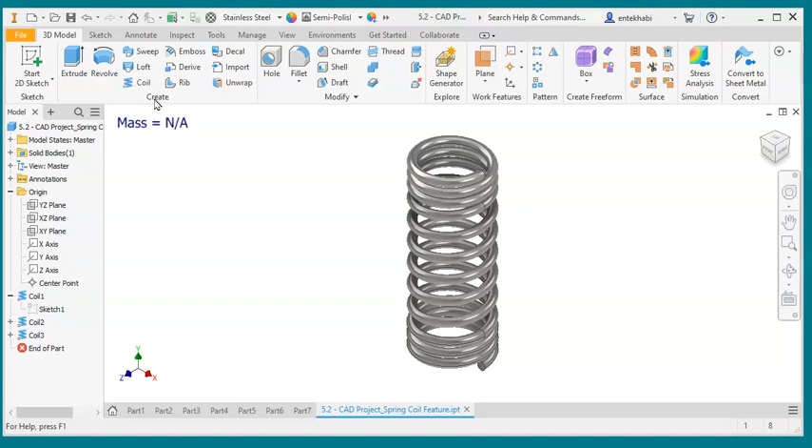Okay, for this project 5.2, the idea is to use a coil feature in Inventor and create something like this spring, which has two distinguished parts.

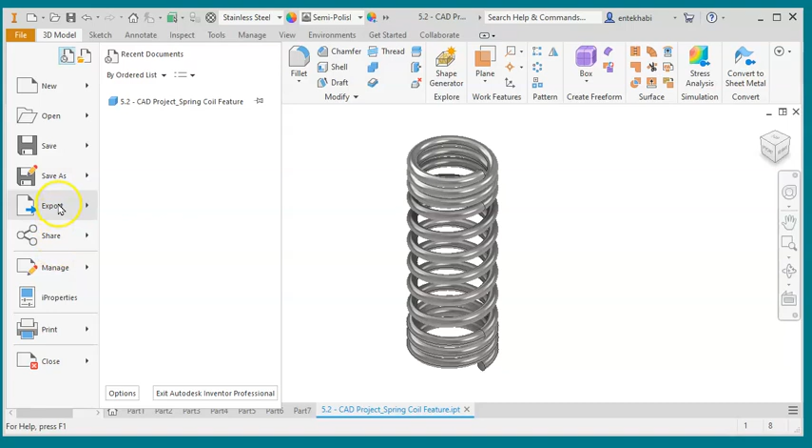One middle part is stretched more, and the ends, top and bottom, are compressed. So let's begin a new file, in the English system. The specification is given to us based on this information. We will be creating this spring.

We have number of revolutions for the top and bottom to be 3, coil diameter 0.2, height 1, radius of 0.75, and pitch, which is the distance between each revolution, 0.25. For the middle part, we have different settings: number of revolutions 6, height 3, and pitch 0.5.

As you see, the height is increased, so it's going to be stretched more, and the pitch is again a little bit more, the spacing between each revolution. So based on that information, we will begin a new sketch on the XY plane.

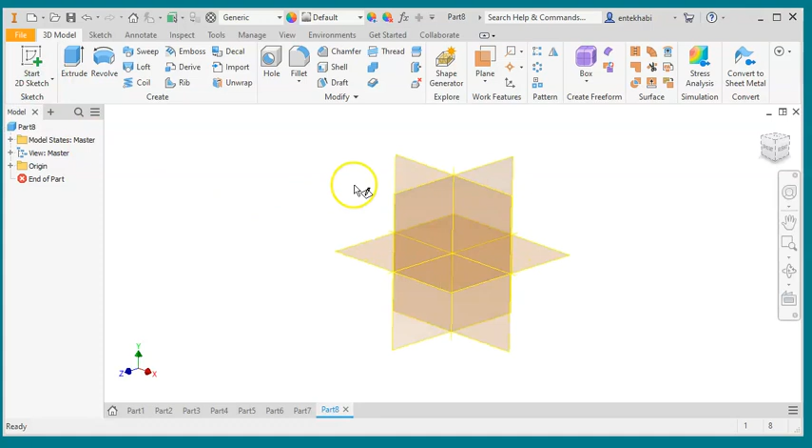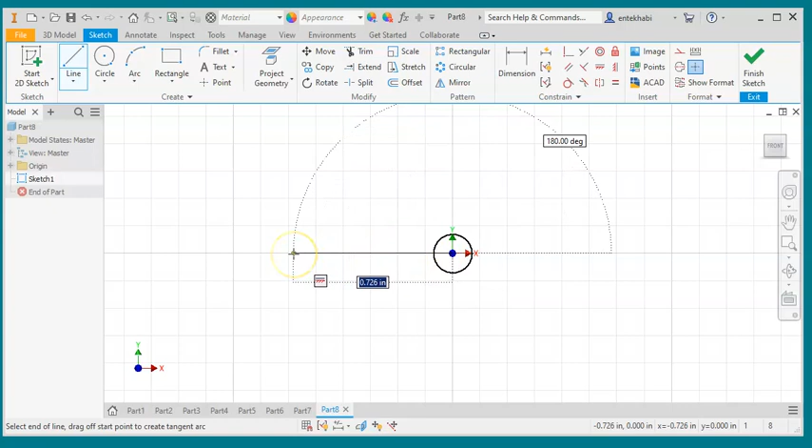Start a circle at origin. We draw a line, and another vertical line, one horizontal, one vertical. We add dimensions. This time, based on the radius, which was 0.75, I'm going to add that for the bottom piece we are going to create first. 0.75, and for the height, I'm going to use 1.

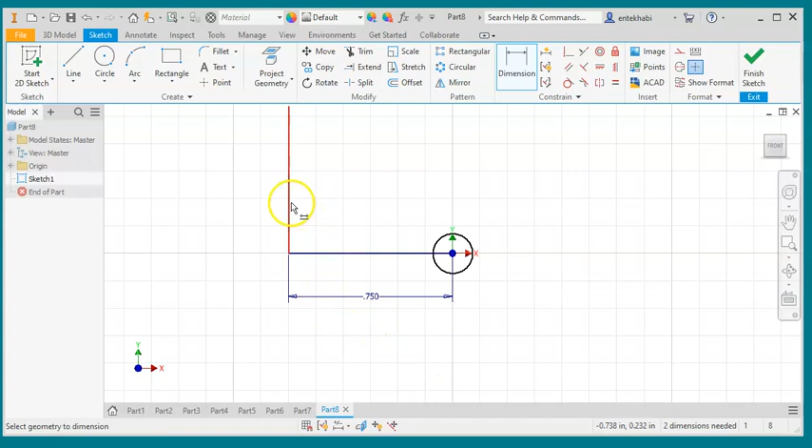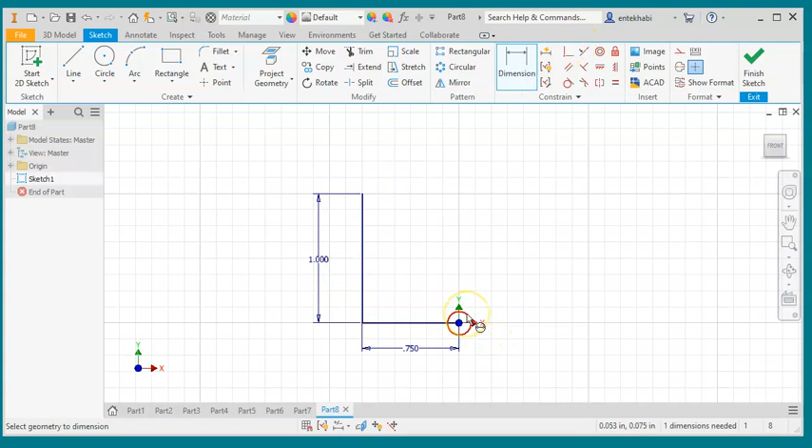That gives us some guide. Even if it's not 1, you can always create a different size, but when you type 1, it's going to be the same, so this doesn't have to match your actual height, because height is part of the settings we will add within the coil tool. This diameter is given as 0.2, and that's all we need for the sketch.

It's fully constrained. Finish sketch. Now we will apply this coil tool, which is on the modeling feature. As you see, under the loft, you have this coil.

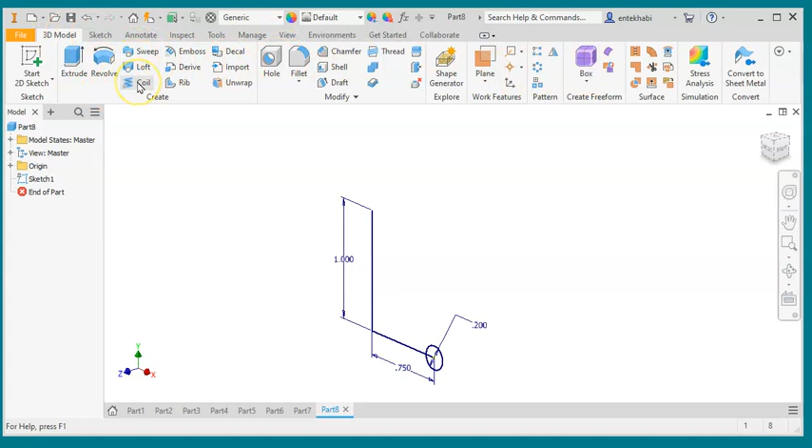Select that. Once you select, you see this automatically picks the profile for you. If it's not, then you can select the profile, but in this case only one automatically picks.

Next, we have to look for these settings, which are under behavior. The earlier version had a slightly different menu, but it's the same concept. Here the method is pitch and height, so we do have that same information since we know the pitch and the height. If we have different information, such as revolution and pitch, which number of revolutions was given, we will use that. Actually, we have that information also here, number of revolution and height, and number of revolution and pitch.

We can pick any of them for the first one, so let's stay with pitch and height. We do have that one too, so let's do that. We will begin selecting our axis. We have already picked the profile, now we pick the axis, keeping the setting on pitch and height.

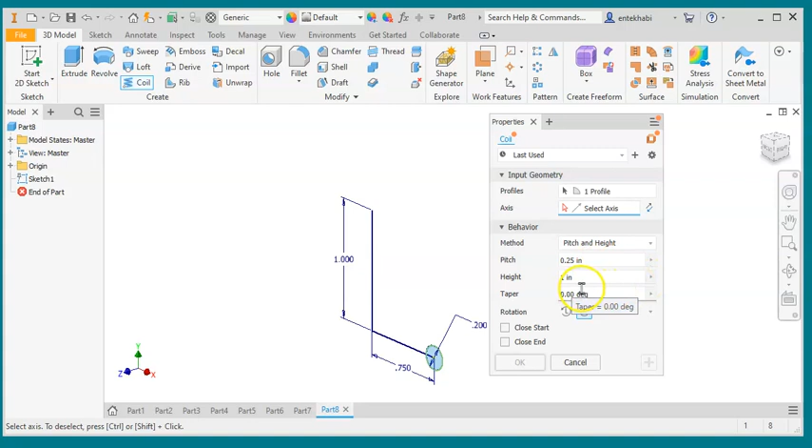Before we do that, we need to make sure we have all the information. Here the 0.25 is the pitch given, and height is 1, so that's correct. I will pick the axis, which is this vertical line. That gives me this portion, which is the bottom piece. Now we have that. I'm going to use orbit and rotate this a little bit.

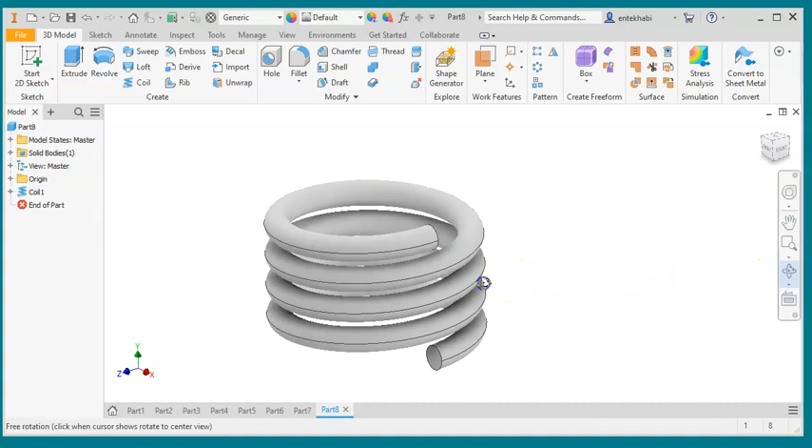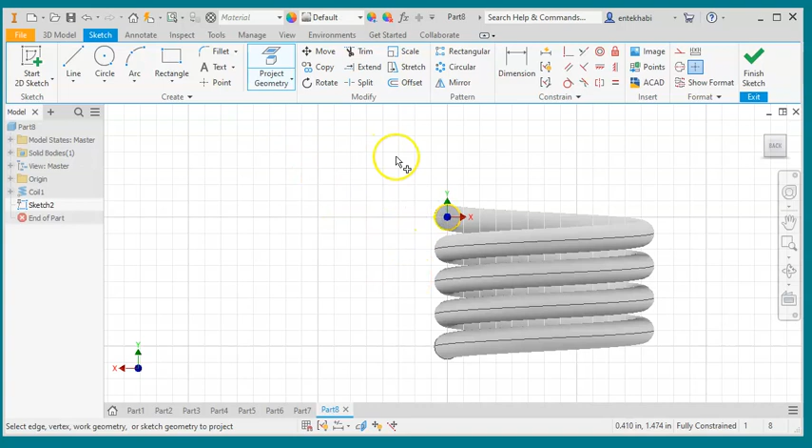Then to see this face, escape to get out of the orbit, select this face and say new sketch. Now I can use project geometry and select this face, and that creates the circle for me, and then I draw the line.

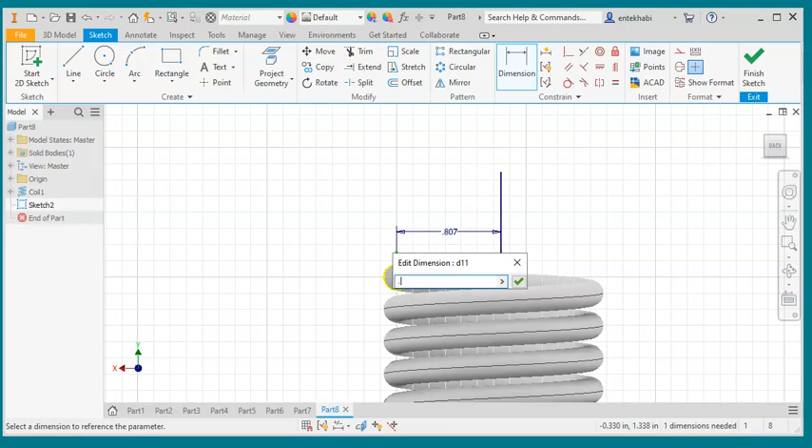The same way I'm going to create this one, and then another vertical line. So this is going to be the middle part. Let's add the dimension to this, make sure it's 0.75. The height is not that critical, I'm going to use the same height, which is given as 3.

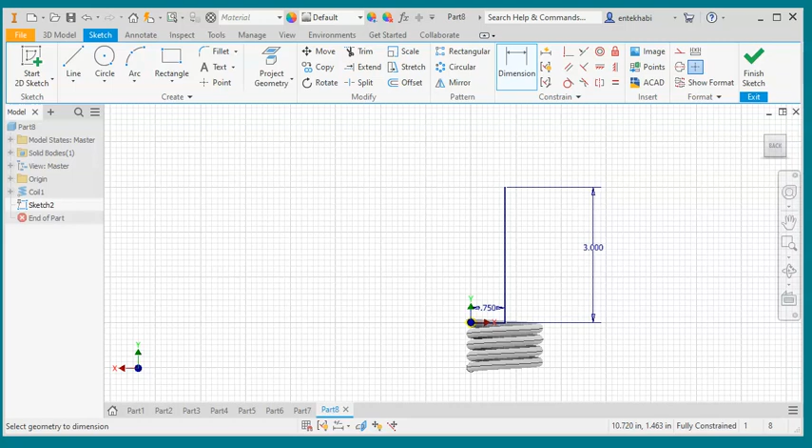We could define the height with the settings as well. So that is the height for the middle part, which is given: pitch 0.5, number of revolution 6, and height 3. Let's go ahead and finish this sketch.

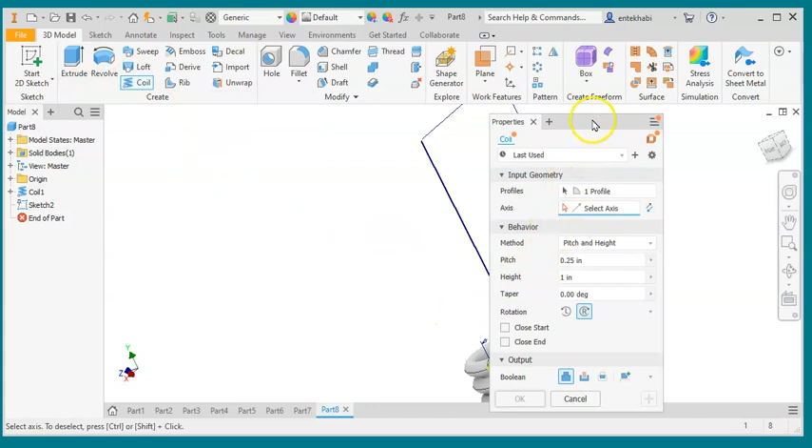I did not redraw the circle, but it should be okay. If you draw it, that's fine too. Let's go to coil, and it should automatically pick again for me. Now we're going to change the information here. Pitch is going to change to 0.5, meaning spacing between each revolution is 0.5, so it's stretched more, and the height is 3.

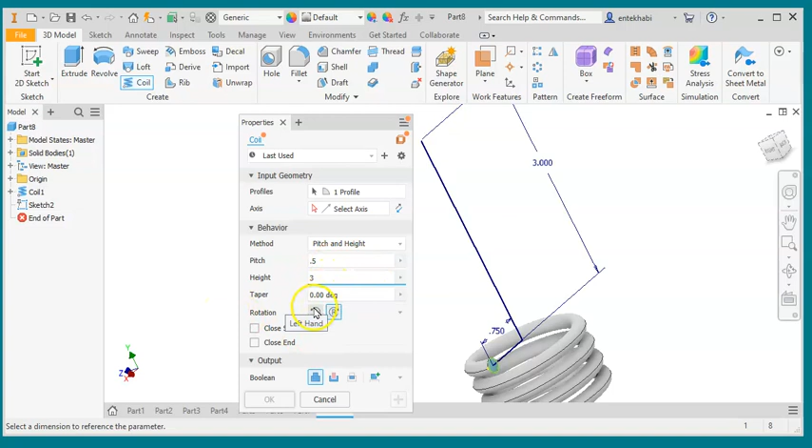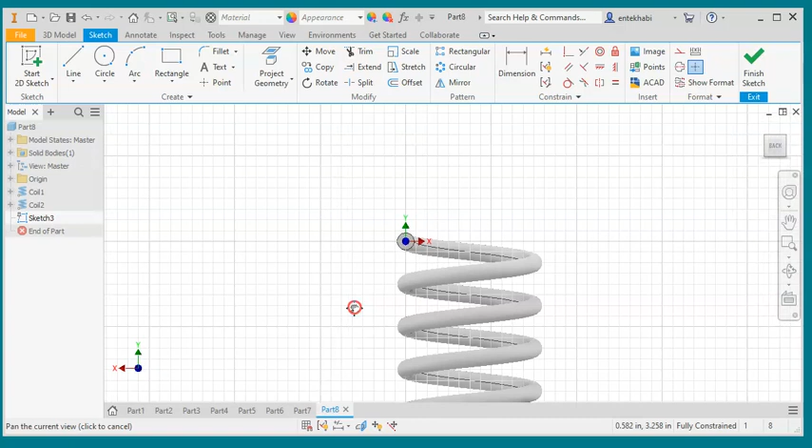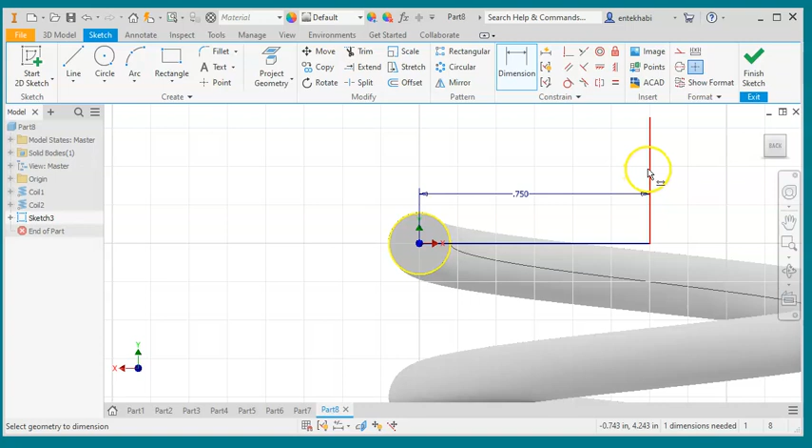I'm going to keep the same settings here, select the axis, and say OK. I'll repeat this one more time the same way: selecting this face, new sketch, project geometry, pick the face, select the line tool, draw the line, make sure it's perfectly horizontal and vertical, add dimension 0.75, add distance of 1 for the height, and finish the sketch.

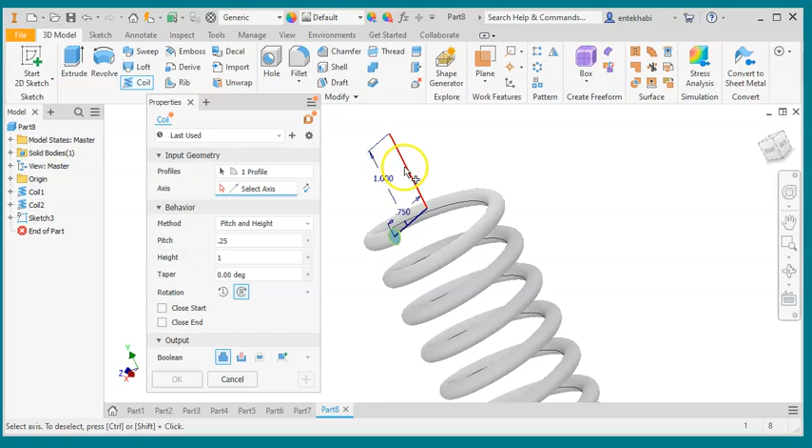Using the coil tool again, you notice it picked already for me, and then I will go back to the original settings, which were height of 1 and pitch 0.25, and height 1. That should select it; if you cannot select that, it means we have not picked this one here. Pick that, select the axis, apply OK, and that completes our spring with the two different settings.

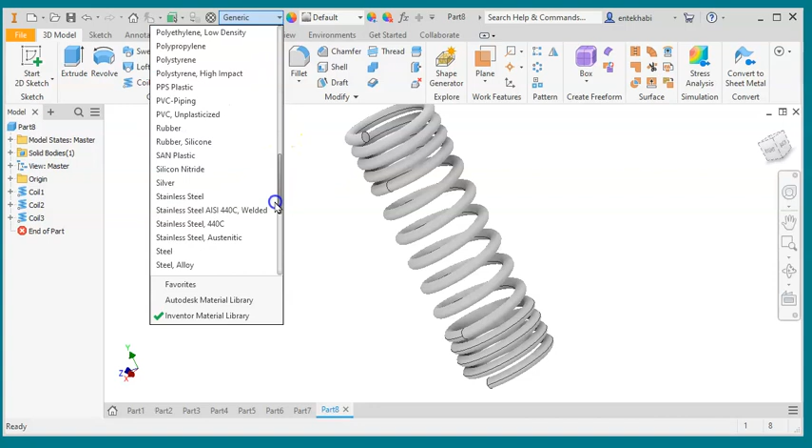Last thing, we will be adding the material to give it a polished look. Let's go to steel — I believe I asked you to do stainless steel — and that is the last thing you would do, and then of course get the information under the annotation.

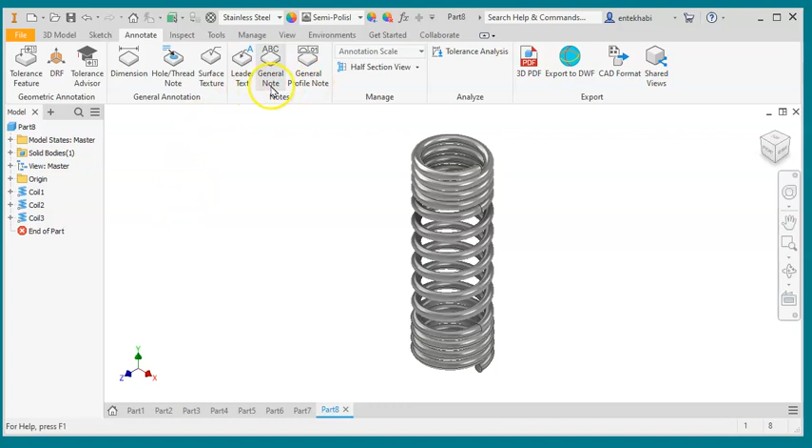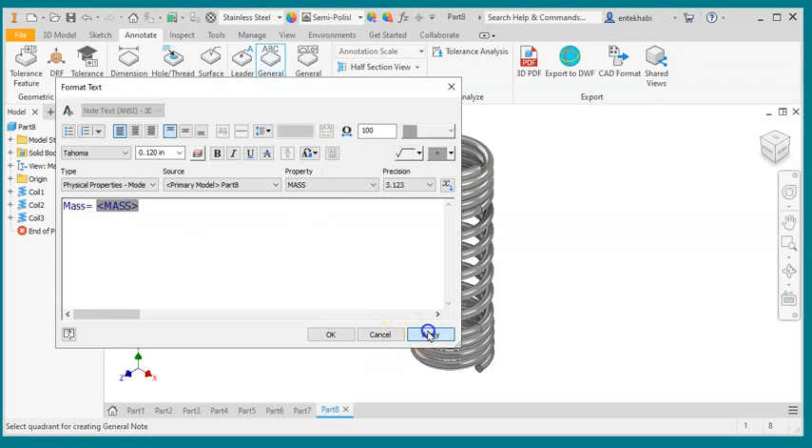Let's see what information this gives me under the general note, and select the physical properties, mass. Mass is equal to — apply and update under the iProperties.

So we have our project completed. I have this dimension, this measurement came out, if we did everything correctly, to 0.599, almost 0.6. So that completes your assignment.